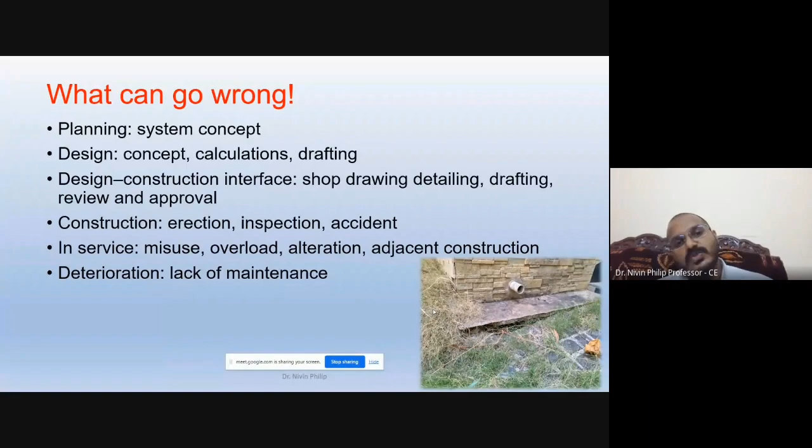So where can we go wrong? We can go wrong at the planning stage, maybe at the design - that is concept, calculation and drafting stage. Construction interface or shop drawing time, it also happens. Erection at the construction time, erection inspection, and accidents also happen. In service condition, maybe overload, maybe design alteration will happen. At the time of design alteration, maybe we neglect some loading condition or alterations - we didn't redo the design. So these kinds of issues will happen. Also at the time of service life, maybe overloading, also deterioration because of lack of quality of material will also cause an issue in the failure of the structure.

So the main reasons for failure may happen due to negligence, then incompetence - that is, failure to understand the engineering principle with respect to technical limitation. When we deploy some engineers at the site, maybe they don't have enough experience to understand the drawing or the shop drawing, and that will also cause issues at the time of implementation. Then oversight - some documents may not consider the safety aspect, that's also an issue. Greed - normally everyone is working on the profit side. Then disorganization, miscommunication between the engineers, the laborers, at the execution stage - these will happen. The reasons for failure will vary, so we have to identify the exact reason.

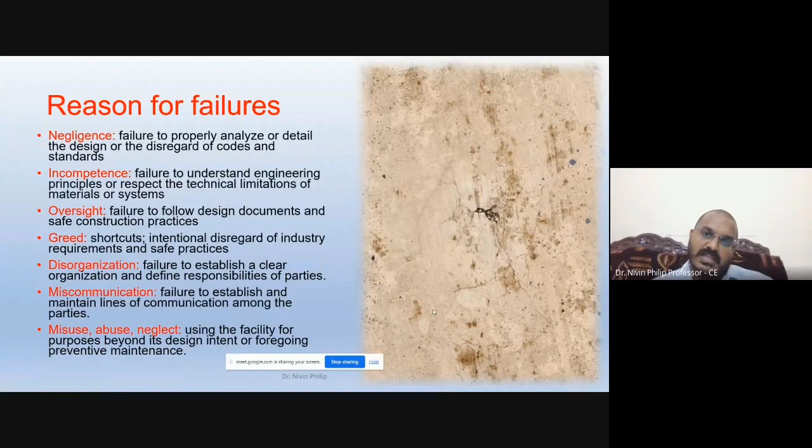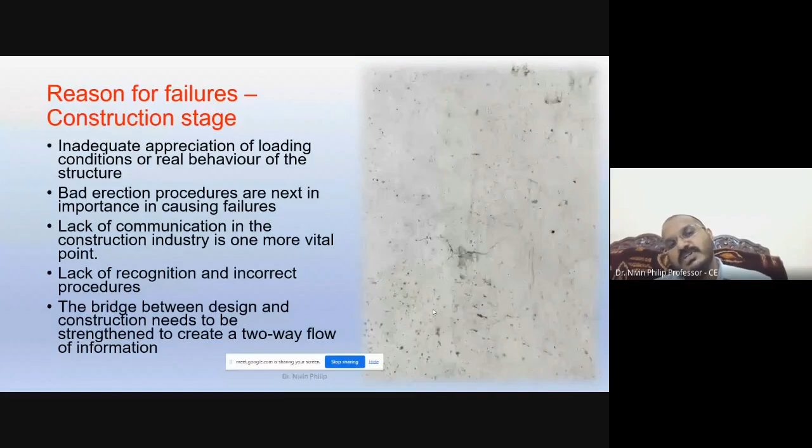Then also at the construction stage - inadequate appreciation of loading condition, bad erection, lack of communication between the structural part and the construction execution part - this will cause an issue. If you look at this figure, these cracks happened due to the construction and the design. This slab crack happened when the design gives a two-way slab with short span and long span.

So this exact reason we are finding, we have to find when we are going for a forensic investigation. What kind of failures can we expect in a forensic case - maybe structural deficiencies such as overstressing, cracking, excessive deformation, or vibrations that are observed. When a part of the structure fails, say 50% of the structure is failed, sometimes the damage already occurred before.

When we face such cases, it is already in dispute or in court, which already happened - maybe when I have attended some cases which already happened in 2010, and I am going to visit in 2019. So it already happened 9 years before, and we are going to judge and evaluate that kind of structure. This is what happens when we go for a forensic structure investigation.

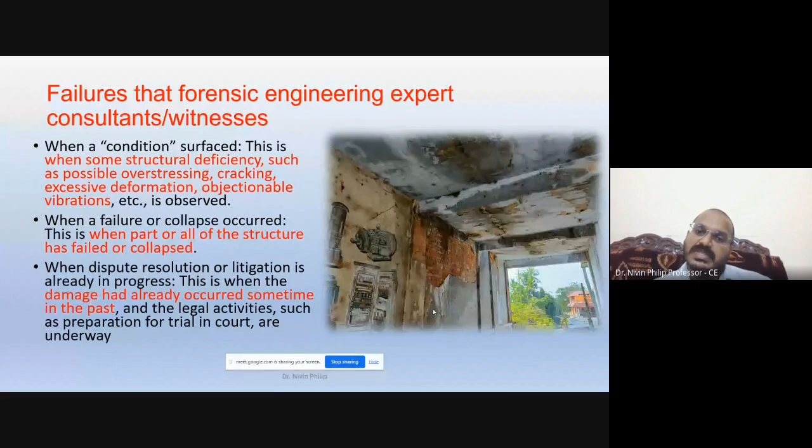You can see this side, it is an old construction which has happened, and this is the structure. You can see most of this structure, it's not a structural failure, it is more of a deterioration failure. So the quality of the material is comparatively poor, and maintenance we can say is less. So these kind of many factors will come into picture when you are going for a forensic investigation.

So how do we avoid this? How to avoid means, how will you evaluate? We have to evaluate by structural engineering level, that is at the design level, or material quality level - how the quality of material we are using. Then we have to know, when we are making a complicated structure, we should know what should be the behavior, how it behaves - that is what we have to evaluate.

Then based on observations, we can identify any inharmonious material, defective specification, any settlement, restraint or constraints that happen, any severity in secondary stresses acting on the structure from time to time, maybe any modification. The stresses acting on the structure - if any defect already happened and we are modifying the structure, then that failure may be prone to failure, or may extend the failure.

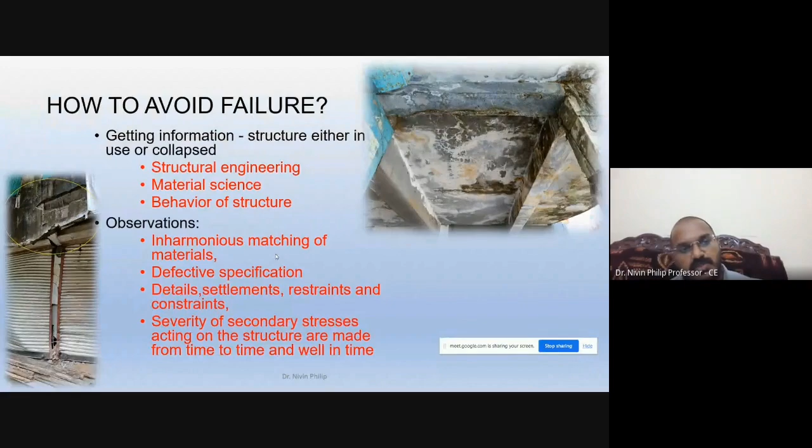Also, some cases happen when an accident or something happens, the structure will also fail. That case also we have to identify - the exact reason or how much damage happened in the structure. The left side figure is due to a collision of a vehicle into the building, and the total column and nearby beam has collapsed. So these kind of cases will also come, other than quality or design issues.

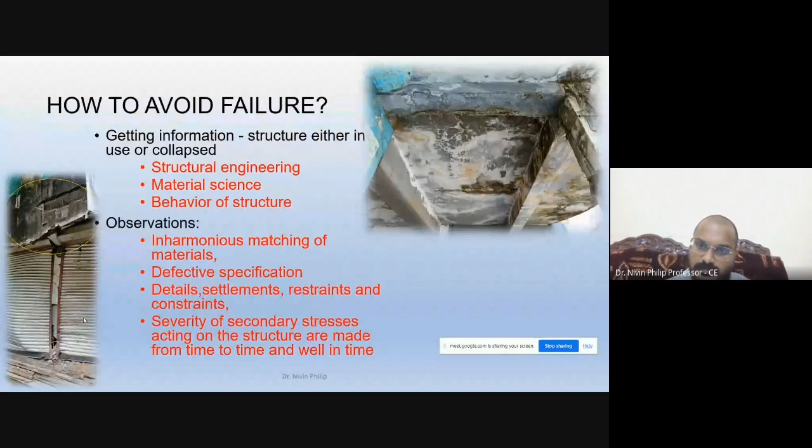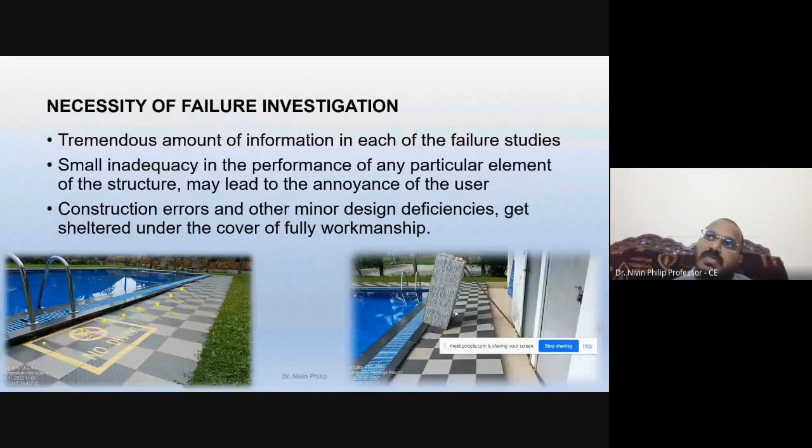So why is investigation necessary? Normally we require a tremendous amount of information when we are going for failure studies. Small inadequacy of performance in any particular element of the structure may also have an issue in the failure. So construction errors and minor design deficiencies get a shelter - they hide within this.

So in most cases, if anything happens, it will go to the workmanship - it is attributed to the construction. But actually, a lot of cases are there where the design itself has some fault. So in forensic investigation, we are identifying these kinds of reasons.

So then at the investigation, what should be the outcome and how should the technique be done? When we are going for a forensic investigation, we have to collect information from the technical side, as we already told. Then political issues - anything that happened inside. Then the legal aspect - how the failure happened, what will be the legal procedure, whether it is in court or with any dispute committee, we have to go through that also. Then serviceability - whether the failed structure is repairable or total demolition is required. So that kind of studies.

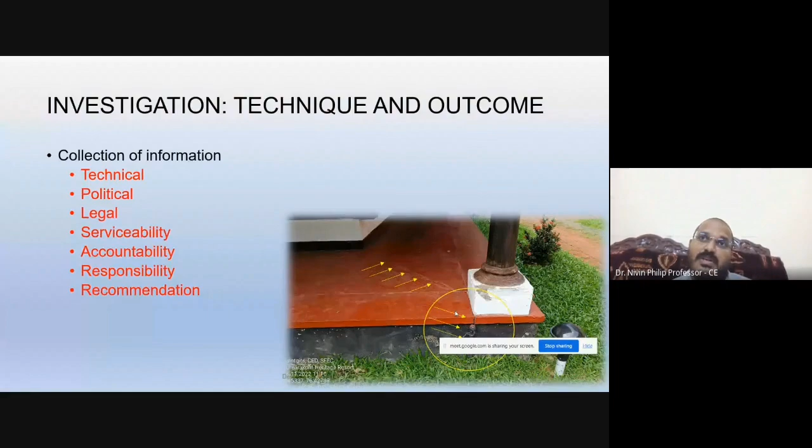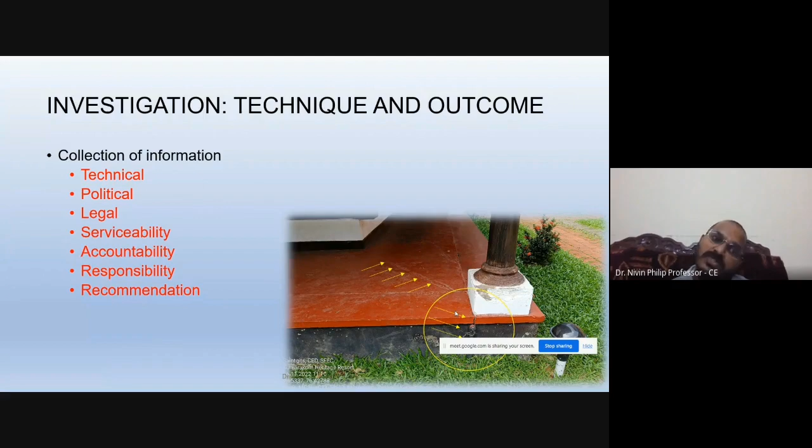Then accountability - accountability means when the failure happens, who will be accountable? Who will pay for it? If any insurance is there, or if there's any fault due to external issues, who will be accountable for this kind of money? Then responsibility - who will be the responsible person to take the remedial action? So accountability and responsibility will be a main part in forensic investigations. And also, as engineers, we have to give recommendations and solutions - who should be accountable, who should be responsible, and we have to give the exact solution.

We also need some constructional aspects. Confidentiality should be required when going for forensic investigations, since in most cases these are for a legal aspect. So what we are doing should be confidential, then costing, then we have to identify at what stage the failure occurred, and identify any unusual loading, misuse of the structure such as overloading or any alteration not intended in the initial design.

Then deterioration of the structure may be due to poor quality of material used, external chemicals, or other issues. Then special activity damages, and additional alterations as I already told you.

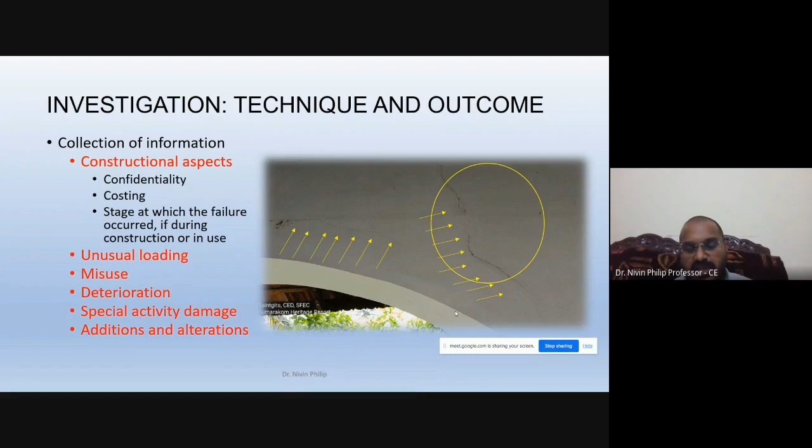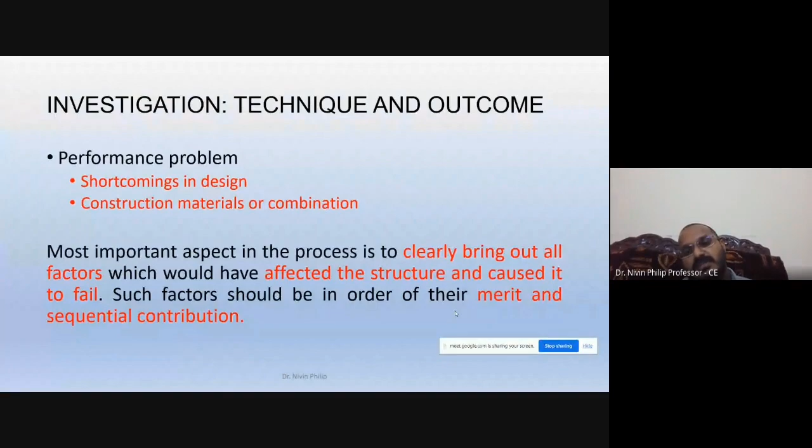We have to identify the problem, collect data, and then decide what recommendations we are giving, checking any shortcomings in design, construction, or material combination. We have to clearly bring out all the factors that affected the structure and its failure. That is the main aim of structural engineering.

So why is it different from a conventional investigation? What we do is go for an investigation involving observation, technical assessment, damage causing source, and present safety recommendations normally. We are not going to give the exact solutions, because that requires a certain level of investigation and additional equipment for proper assessment.

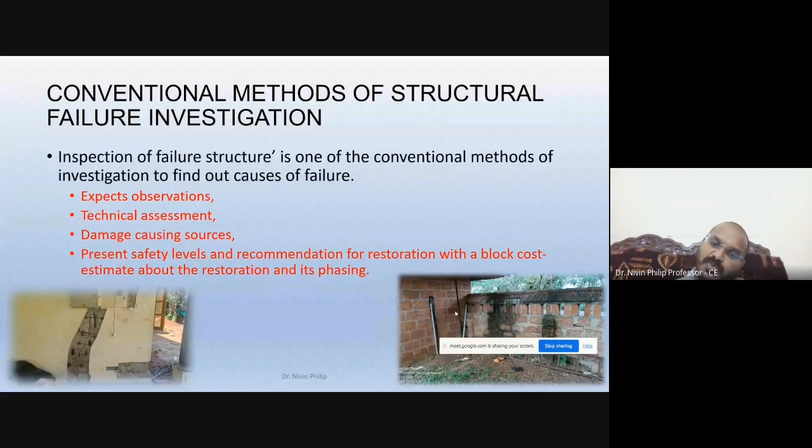So in early days, we only did visual exploration or some small non-destructive tests like the rebound hammer test. But now we have to give an exact solution, how to rectify or how to give a proper solution.

These are the conventional checks when going for inspection: checking the external facade for any peeling of plaster, efflorescence, plinth protection, any water presence or groundwater flooding, any plumbing issues, additional projections or construction on the building, terrace inspection, and housekeeping for any water flooding or improper drainage. These are the things we normally inspect during a normal investigation.

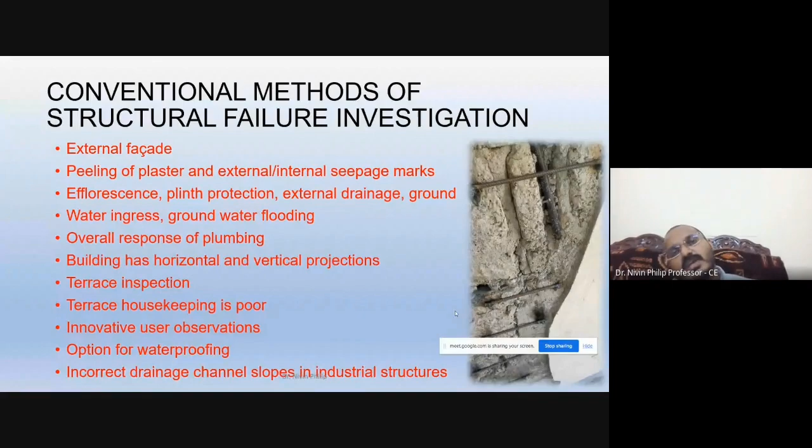So why forensic investigation is important is because we need the exact technical specification of what solution, at what location, should be given. That's where forensic investigation comes into picture.

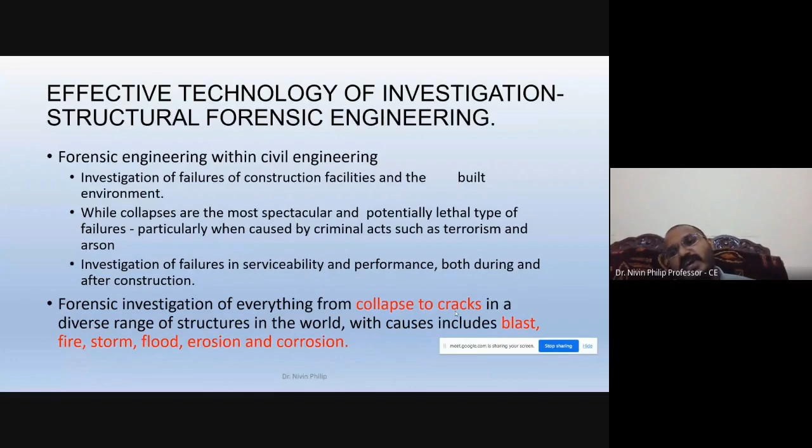Forensics means investigating everything from collapse to cracks across a diverse range. That means we have to identify the reason from the design level to the collapse level. It may be caused by seismic activity, flood, corrosion, fire, etc. We have to identify the exact reason.

So exactly, forensic investigation means gathering necessary information on the cause of failure, applying engineering to define an instance when a structure does not conform to design expectations. When it is not designed, failure may also be due to insufficient design. If the structure is not properly designed, that is also a failure condition.

Collapse is not always necessary when you say a structure has failed.

So what can be done in a structural forensic investigation? First, we have to identify the damage assessment, giving exact reasonable clarity on the causes of damage and measuring the extent on the structure. Also decide the appropriate corrective measure - how will you quantify it, and how will you rectify it? That's the main part.

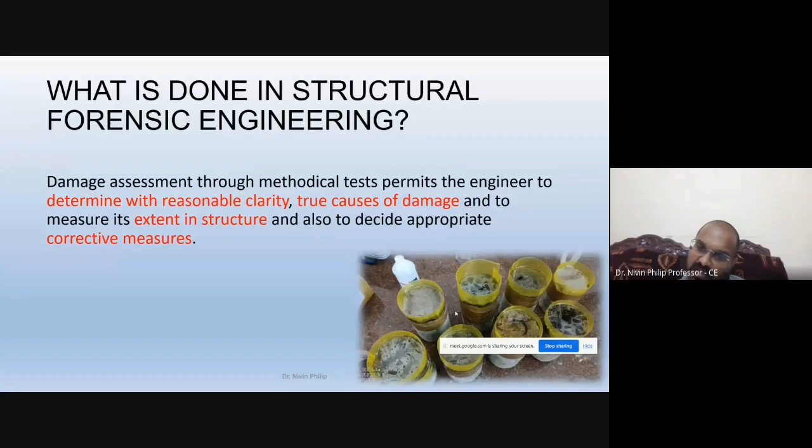In structural forensic investigation, we can do this in two ways - destructive testing and non-destructive testing. In destructive testing, some examples are given: we take a core sample for compressive strength testing. This is the cylindrical core sample we cut from the site for testing compressive strength, as shown in the last slide.

Then for RCPT, rapid chloride penetration test, for checking permeability or porous nature, we take samples around 100mm diameter by 50mm depth. From that, we identify the porous nature of the concrete.

Then we drill samples from the site of the structure to identify the presence of chloride or sulfate in the materials, or whether the structure is exposed to chemicals causing deterioration. Then steel sampling - we take a sample from the steel structure first, then do a pull-out test to identify the quality of the concrete.

Then some chemical tests - when we take samples, we can go for scanning electron microscope or EDX XRD analysis. We can identify the presence of chloride, sulfate, and any alkali aggregate reaction. We can technically do all this with these kinds of tests.

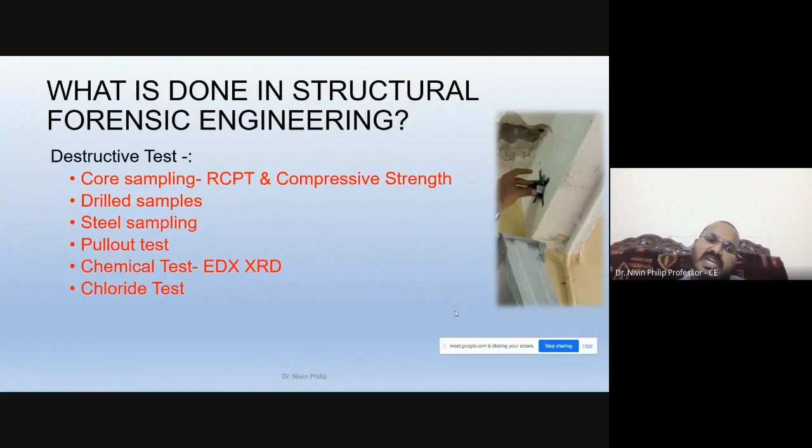So why is NDT important? Sometimes certain structures may have failure that doesn't happen from the outside. So NDT is a good solution. Other than destructing certain reinforced structures, maybe highly reinforced concrete structures, core sampling is not a good solution because we are cutting the reinforcement. Sometimes that will happen. So in order to avoid that, we can go for non-destructive testing.

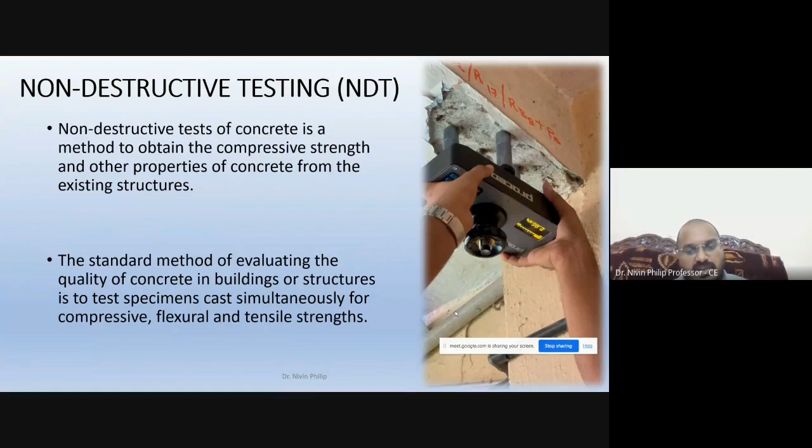In non-destructive testing, we are measuring different kinds of properties like compressive, flexure, and tensile. These are some of the techniques we use for non-destructive testing, like the rebound hammer, which most engineers already know, used for measuring compressive strength. Then UPV, then rebar locator to identify the exact location of the rebar, whether it is given as per the specification in the structural drawing, or when taking any corrosion test we have to locate the reinforcement. Then half cell potential to identify the corrosion rate, to know how much corrosion has happened to the steel. Then pull-off test to identify the cover.

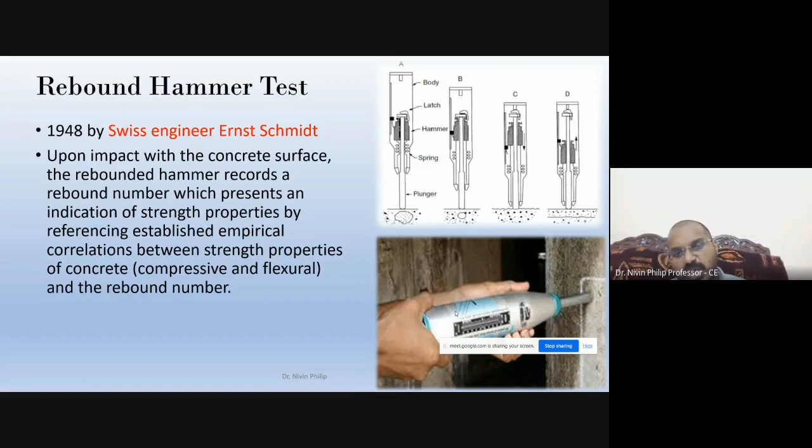Let's go deeper. The rebound hammer, most of them know - we are measuring the rebound number from the concrete surface. I didn't go into the theory. One thing you should know is that when going for a rebound test, if 1 point is concerned, we should take the average of 9 points. The surface should be smoothened, then only go for the rebound hammer test.

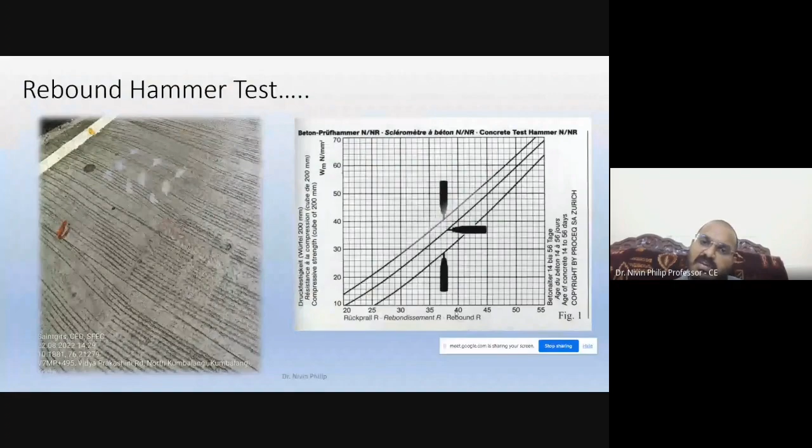Based on the position, how we are holding the hammer, we will get the result based on this curve. So the only thing is, when you are checking 1 point, you have to take at least 9 points, like a grid you have to form. Otherwise, the accuracy is only 15 to 20% variation that will be there with the composition of the cube. So we normally take the average value.

So why are we taking an average value? Because the smoothness of the surface, geometric properties, age of concrete, and surface and internal moisture condition will also influence the rebound value. That's why we are trying to average the rebound value number of a particular point.

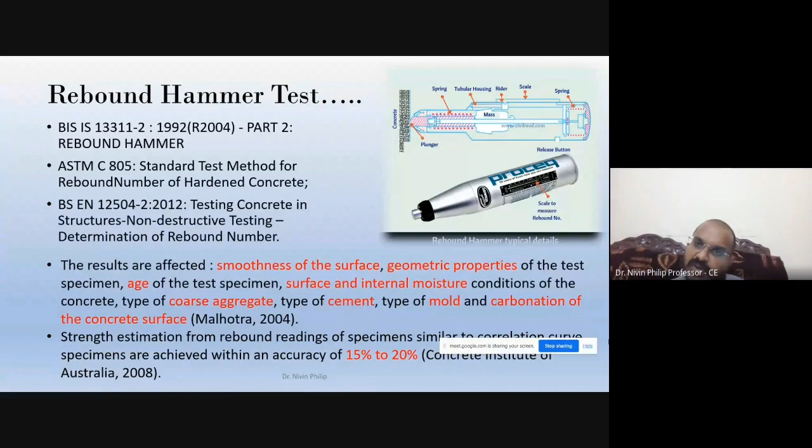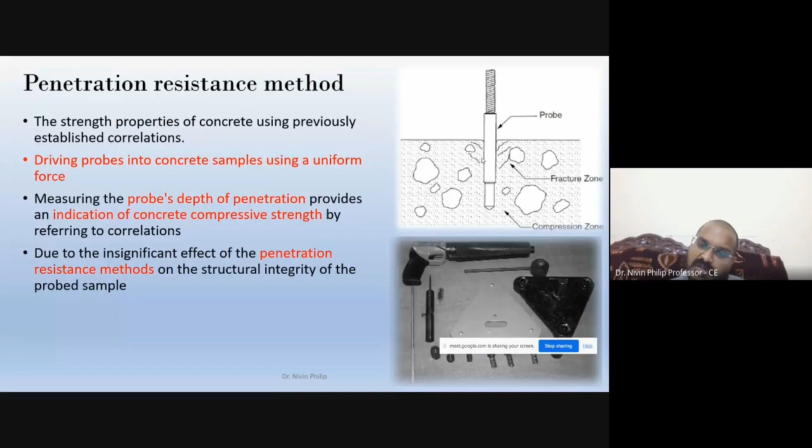Another method is penetration resistance. In penetration resistance method, we are punching a needle into the concrete, and based on the punching depth, we are identifying the strength of the concrete. Nowadays, we are not using this much. In some technical applications it will be there, but we are not recommending it, because if the structure is not damaged, it will create internal cracks on the nearby surface. When we are hammering or giving a punching action through hammering, this will create internal cracks which will later cause some issues in the concrete. So anyway, this test exists, but based on the penetration depth, we can identify the quality of the concrete.

And these are the codes which govern these test methods. Another method is also influenced by operator error. Size of the aggregate will also matter, and the nature of the concrete. Everything - the NDT value will be influenced mainly by, one of the main points you have to note, size of the aggregate has a very much influence on the strength.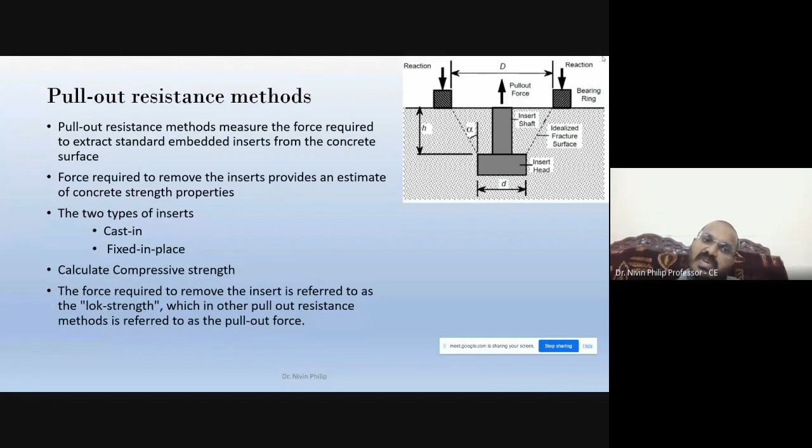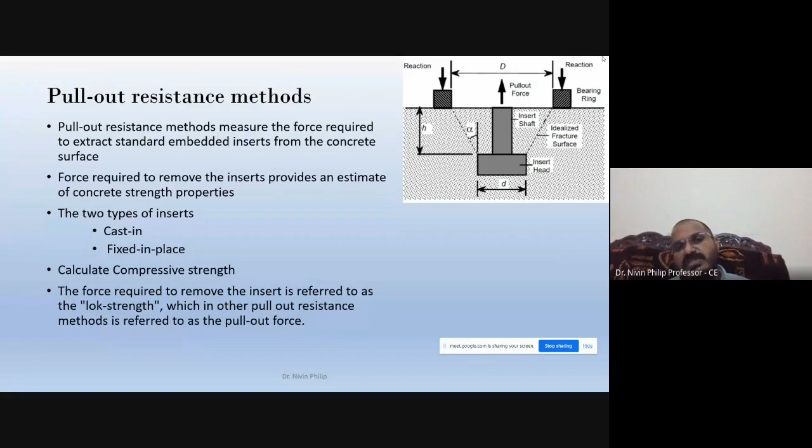So what we are doing is inserting a shaft, and this shaft is pulled out from the concrete. From the pull out, how much resistance it gives, we are measuring. Based on that, we are predicting the strength of the concrete. This is mentioned based on the ASTM standards we are using. Here also, the main influencing factor is aggregate size and the cement mortar, and how much depth we have inserted this head portion - how much depth we have inserted also affects the resistance value.

Next is pull-off resistance. This is very much important nowadays, in which what we are doing is a method to determine the quality of cover concrete. Cover concrete means the reinforcement cover concrete. We are checking the bonding efficiency of the cover portion to the reinforcements. If the reinforcement is corroded, then the bonding between the cover concrete or outer layer concrete doesn't have any contact with the reinforcement, then it will be easily pulled out.

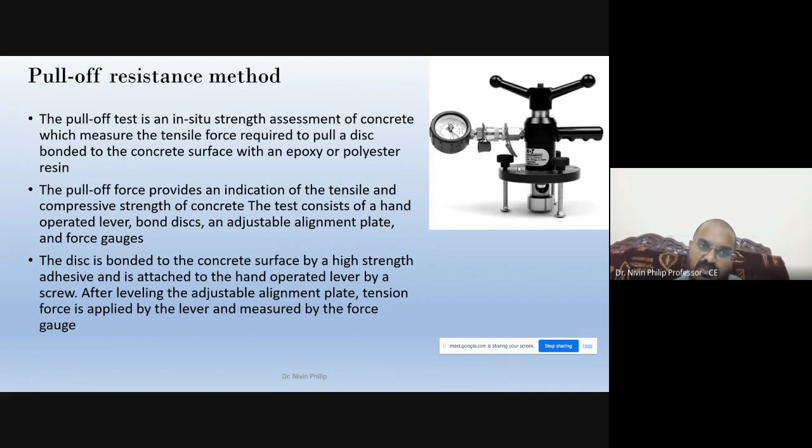So for that test we are using this pull-off test, in which we have a test disc of 50 mm dia. We are attaching that disc to the concrete surface with some epoxy resin or acrylic. Before pasting it, we have to clean the surface properly, maybe with some acetone solution. Then we do the gluing with the epoxy and wait for 24 hours, depending on the epoxy setting time.

Then what we are doing is trying to pull out this disc from the surface. One thing you should remember, after fixing this disc, we have to isolate this portion by making a circular cut, up to the reinforcement layer, about 50 mm diameter, then place the disc. Otherwise, when we are trying to pull out, the nearby cover concrete also has some influence in the bonding, showing some effect on the bonding cover strength. So we have to isolate the glued portion from the remaining concrete. That's why we see a cut is made in this area.

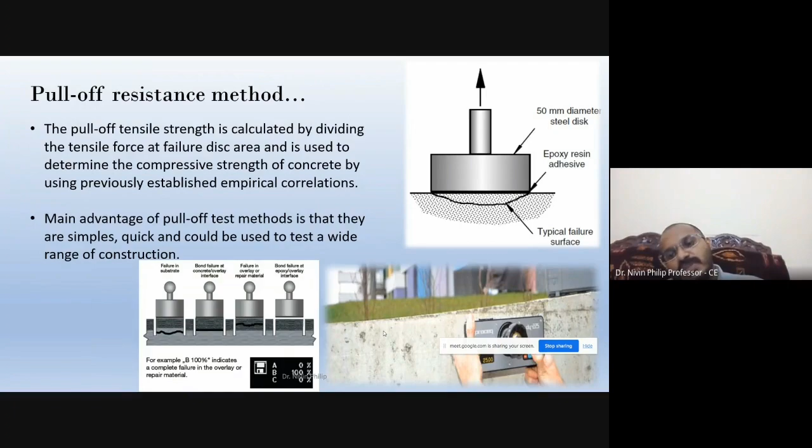Then we try to pull out, and the crack will happen, and we will find out how much bonding strength will be there. When designing, we will see some τbd value, bond strength value, based on the shear stress of the concrete. That shear stress value we get from the test. This test has some limitations: we need 24 hours for setting the adhesive, and it's also influenced by the size and type of coarse aggregate, because we are using a 50 mm dia disc, so a 20 mm coarse aggregate has some limit. Otherwise, we have to increase the size of the disc.

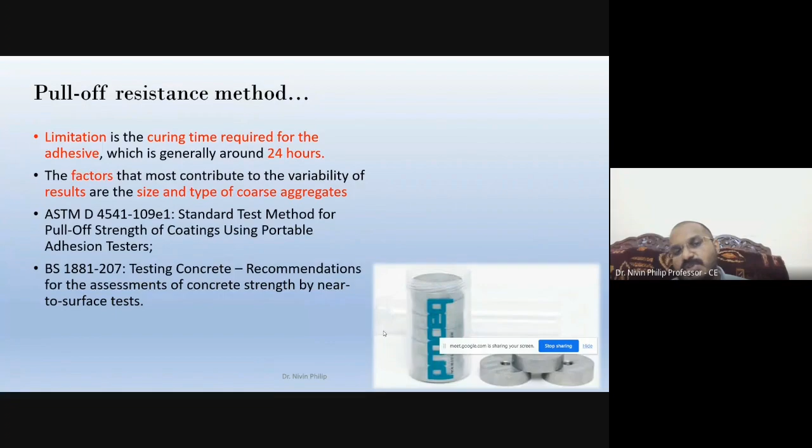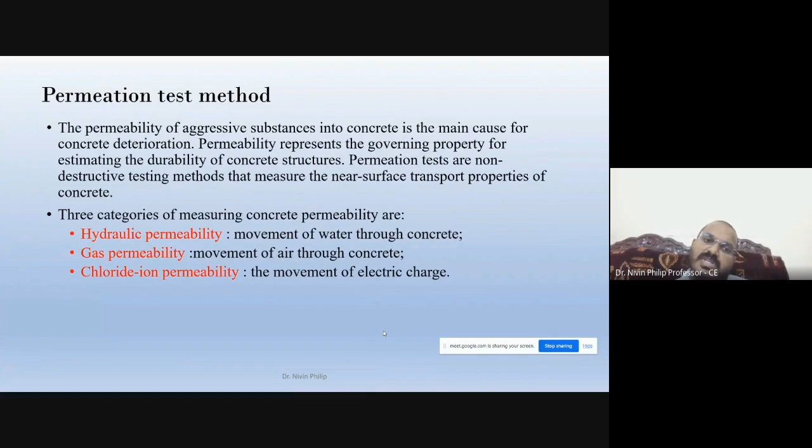Next is permeation test method. Permeation test is a vast area. We can see the permeability test on concrete, where we identify the porous nature. When we are going for chemical pipelines or any marine structure subject to sulfate or chloride solution, we have to check whether it is durable or has less porosity. So at that time we go for permeation test methods. Hydraulic permeability, gas permeability are there. Then as I already told you, RCPT, that is chloride ion permeability - we identify this with the permeation test method.

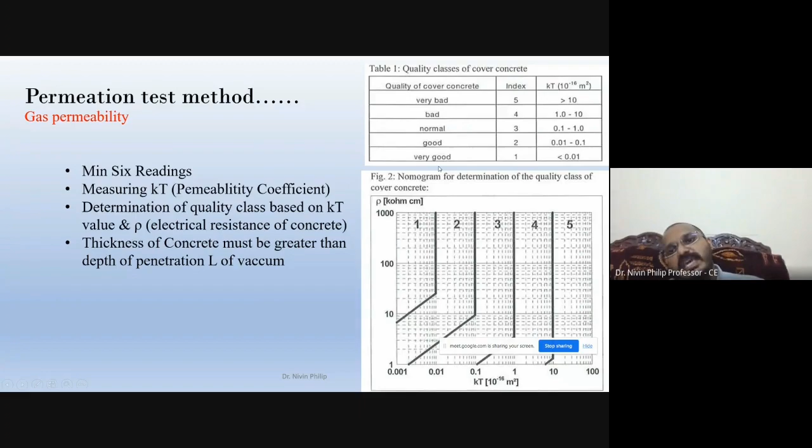Normally it is done for the cover concrete or all the slabs also. Then from the permeability, we get a measurement called permeability coefficient. Based on this coefficient value, we quantify whether it is good, bad, and so on. This classification is based on the kT value. It doesn't quantify any strength or something like that - it's mostly based on the quality of the concrete. Some relations are mentioned, but mostly it is just a representation of the quality.

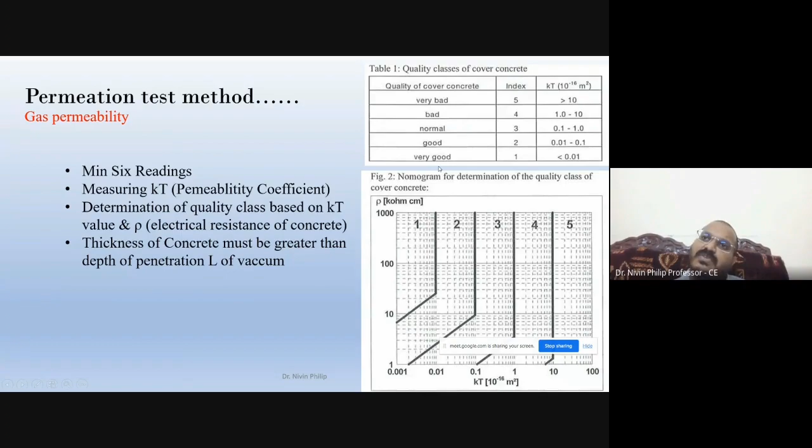High permeability means the concrete is highly porous. For a normal concrete like M25 or M30, if it's good concrete, the range should normally be between 1000 to 2000, or less than 3000. But for high strength or high performance concrete using fly ash or admixtures, we normally get a value less than 1000, because such admixtures give a lower value.

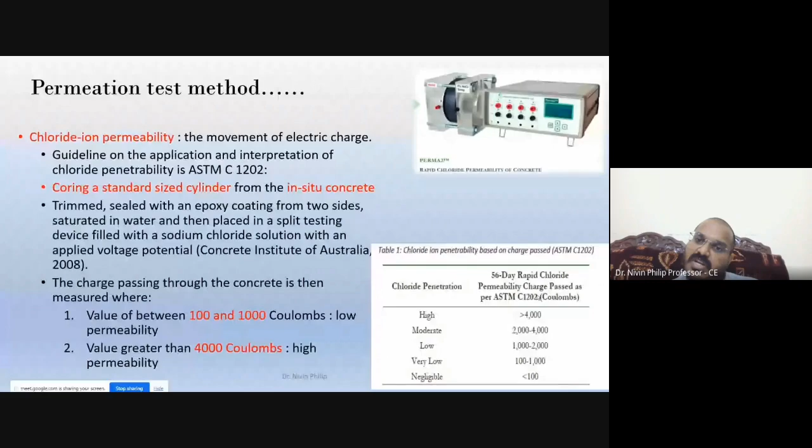In forensic investigation, the use of this is that when deterioration happens, the porous nature increases and the quality of the concrete becomes lesser. In that case, we have to identify whether corrosion is due to poor quality concrete. From this test, we can identify the porous nature of the concrete.

Another technique is ultrasonic pulse velocity. It is used to measure the uniformity of concrete and detect interior damage, any honeycombing, or delamination. So UPV is the initial technique developed.

Now the most modern technique is called ultrasonic pulse echo, which is slightly modified from the UPV test. With ultrasonic pulse echo, we can measure from the same side; it isn't required that one sensor be on the face and another on the side or back side. From the same face, we can identify the echo of the pulse generated, and from that identify any issues in the structure. So this is the modified form of ultrasonic pulse velocity, called ultrasonic pulse echo.

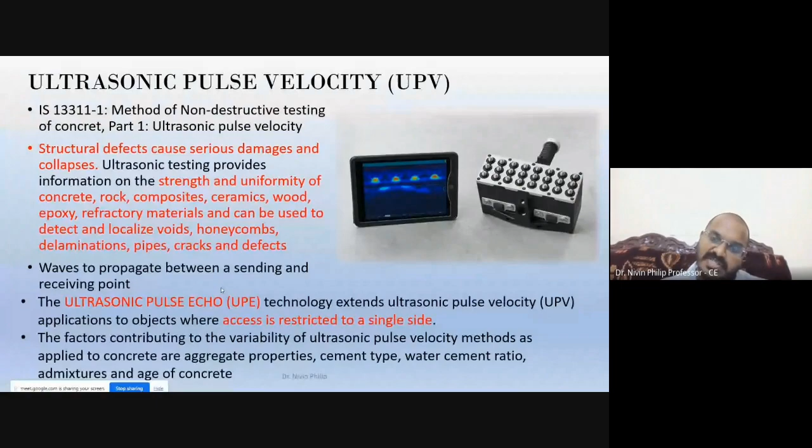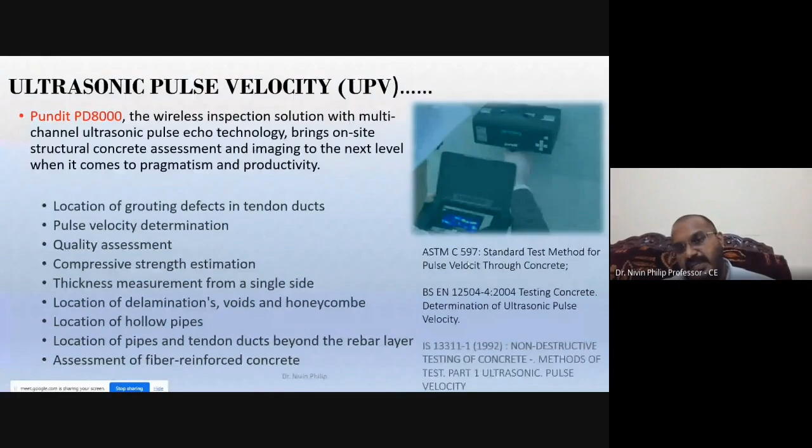And these are the standards. The ultrasonic pulse echo equipment currently available in the market is the PD 8000, given for this purpose, and these are the standards for this kind of test.

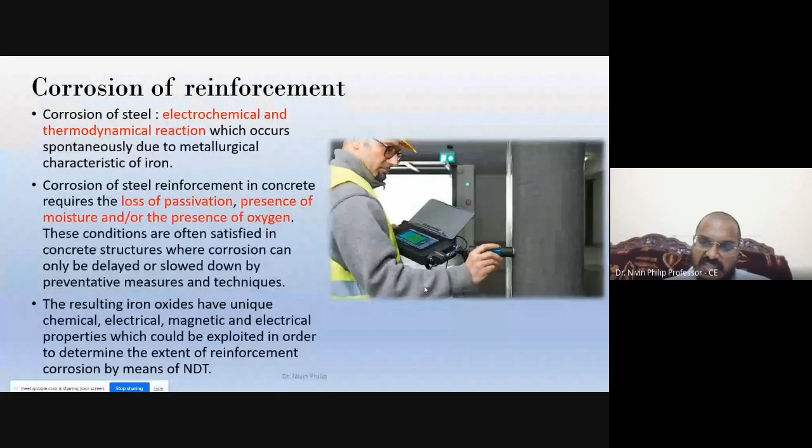One of the main issues in all cases is corrosion. Whatever the reason, moisture or presence of chlorine, corrosion will happen. Corrosion can be tested in different ways because corrosion forms iron oxide, and one of the main advantages is that iron oxide is chemically, electrically, and magnetically conductive, which makes it easy to identify issues in the rebar. So the two methods for corrosion testing are half cell potential, which most people use, and corrosion resistance or corrosion rate, which is a separate, newer technology.

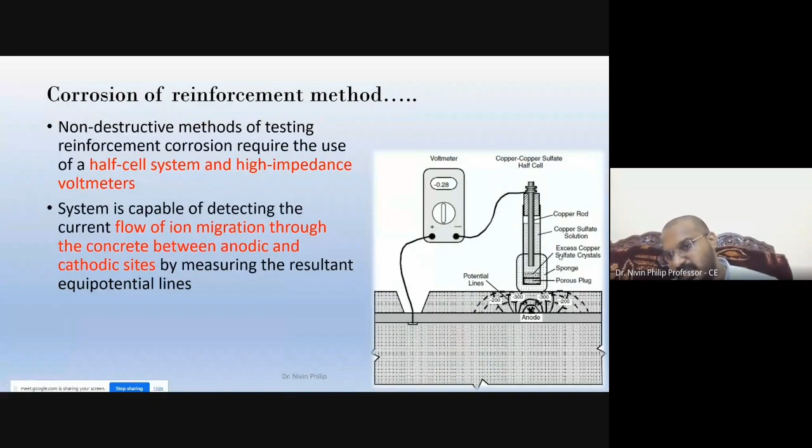In half cell potential testing, we make a half cell using copper and copper sulfate solution. In a concrete structure where the rebar acts as anode, this half cell is placed on the surface of the concrete and connected to a voltmeter's negative terminal, while another wire connects to the reinforcement. One key point is that measuring corrosion resistance requires a connection to the reinforcement, which is the main difficulty of this method - we have to establish a connection between the reinforcement and the result.

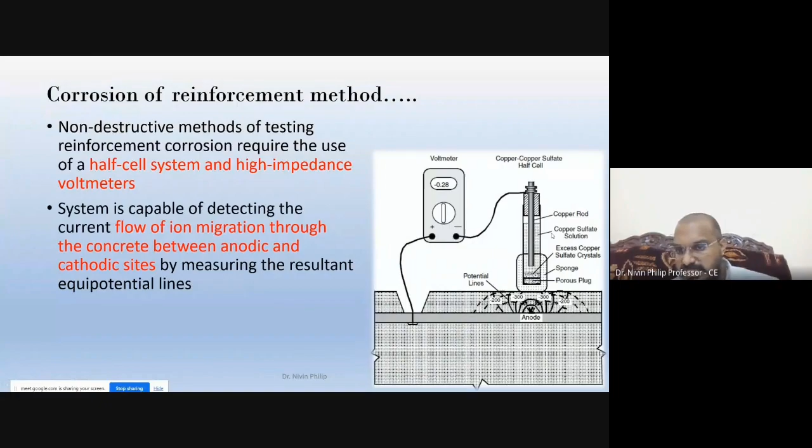This test is highly influenced by moisture content. The surface should have proper and equal moisture throughout; the moisture should not differ across the area, otherwise the test results will be influenced. Current flows through the half cell to the rebar and then to the voltmeter - this is how we make a half cell.

One disadvantage is that the half cell gives a value in only two stages - whether the rebar has corrosion or is good, with no corrosion. If the voltmeter reads minus 350 mV, it indicates 90% probability of active corrosion.

If it is less than minus 200, then 90% probability of no corrosion is there. So in between, we cannot identify how much corrosion has happened, whether we can retain that reinforcement or not. It's a gap in between - either 90% good or 90% bad it should be. So there is an uncertainty in this value.

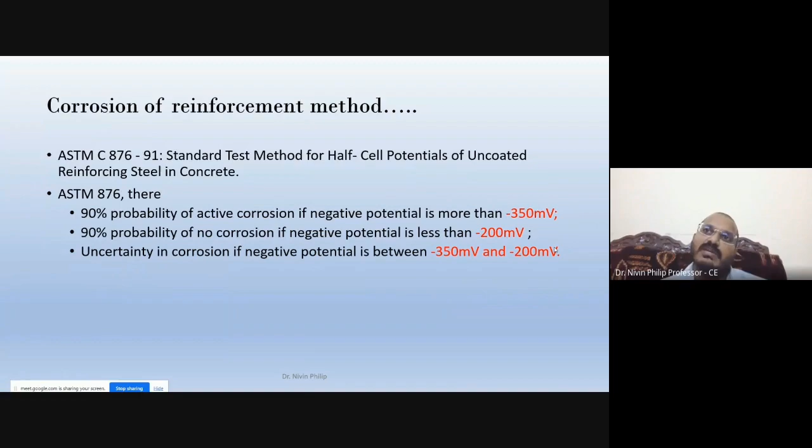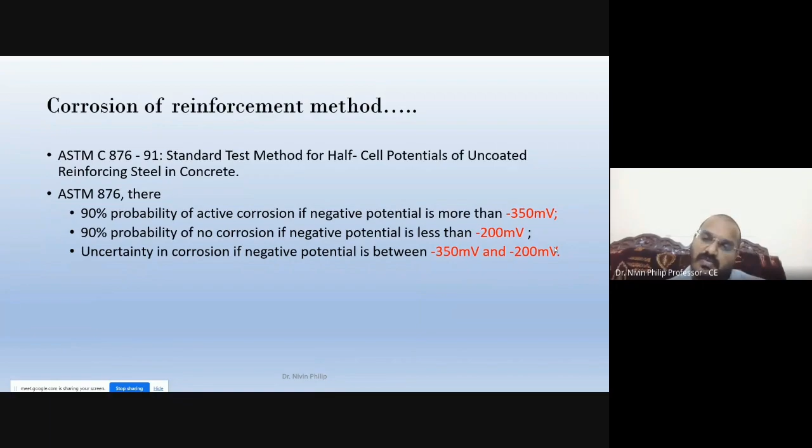If it is between minus 350 to minus 200, we don't have any solution in the half cell potential. That's why we can say that half cell potential is not that much predictable when you are going for a forensic investigation or exact solution. It is not that useful, because sometimes replacing the reinforcement is not required - maybe we can rectify with properly covering the concrete with new cover concrete, which may be sufficient for further reduction of the deterioration.

In that case, this CEPRA technology, or connectionless electrical pulse response technology, comes into picture. In this, what we are doing is measuring the electrical conductivity of the rebar by inducing a high voltage frequency to the reinforcement with electrodes. It doesn't require any connection to the reinforcement. The principle is that at lower frequency, the corroding rebar will show a high voltage, but a non-corroding rebar doesn't have any change in the voltage. So from that technical point of view, we can identify whether the rebar is corroded or not.

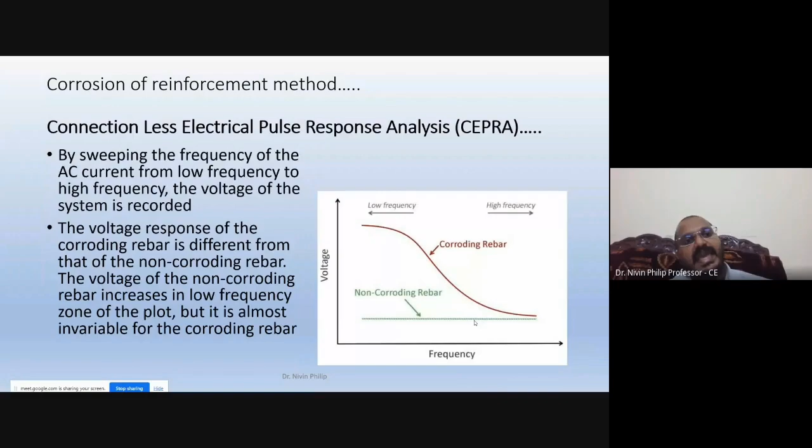And this is the most modern technique nowadays used for finding corrosion. In this case, it is very helpful for identifying the exact reasons for the corrosion happening in the structure.

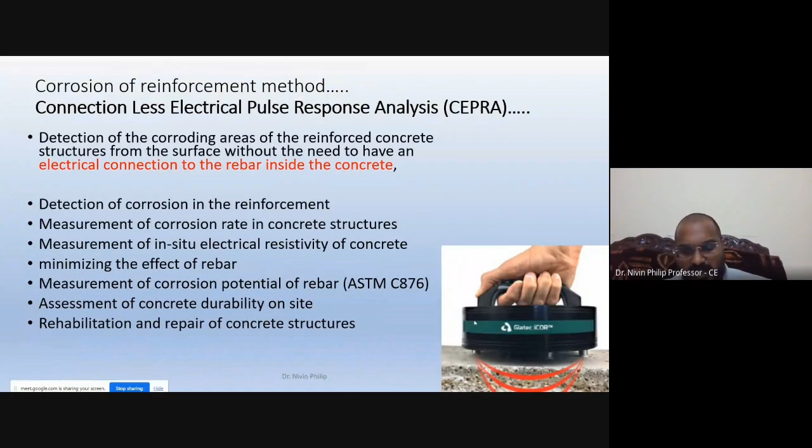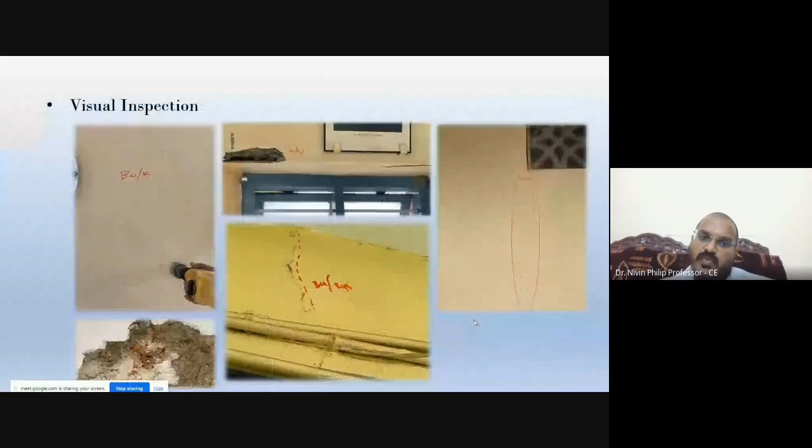Now I'll move on to one case study which I did in 2022. We are investigating a forensic stability assessment of a seminary building, which was vastly constructed in the 60s or 70s in early days. So first, what we are doing for a forensic analysis is the same thing, conventional - we go for a visual inspection, identifying what type of crack should be there, and collecting samples of the materials.

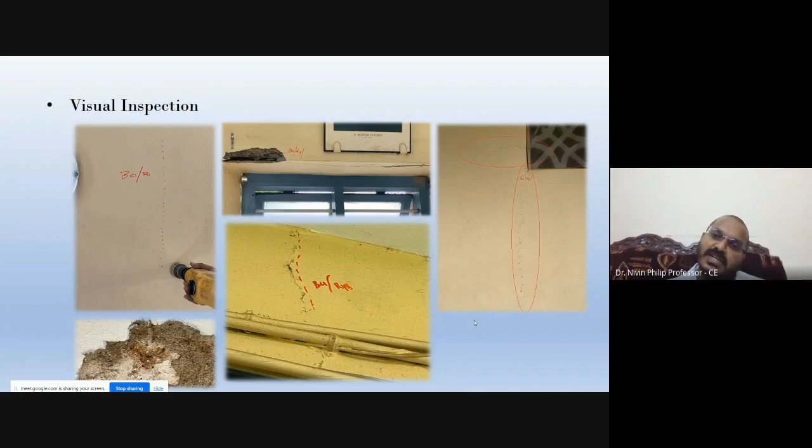We are identifying the location of deteriorations. Wherever there is a crack, we have to mark it and identify how much the crack has propagated, to what extent, whether it is extending to the foundation, and whether any delamination or spalling has happened. So we have to identify everything by visual inspection, and if any moisture presence or corrosion-specific spalling happens, we have to identify and mark each endpoint.

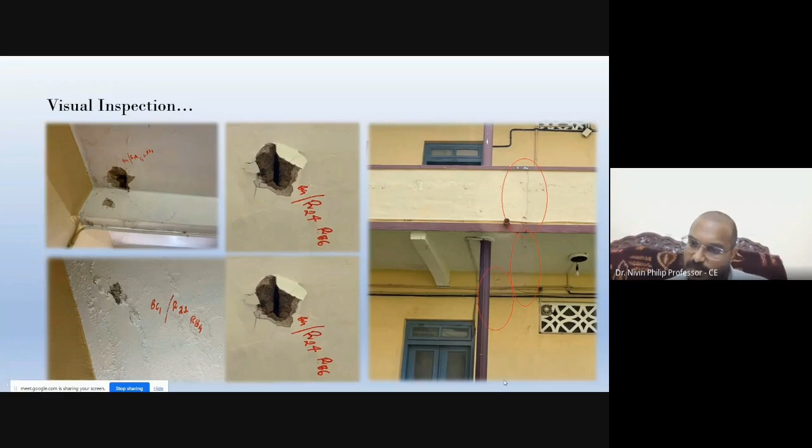So you can see on the right side a crack which is propagated from the foundation level up to the roof slab level. It is going on increasing, so this is the main cause. If you look like that, we can identify that the issue happens from the foundation level itself. So this kind of thing we have to identify before going for any NDT or core sampling.

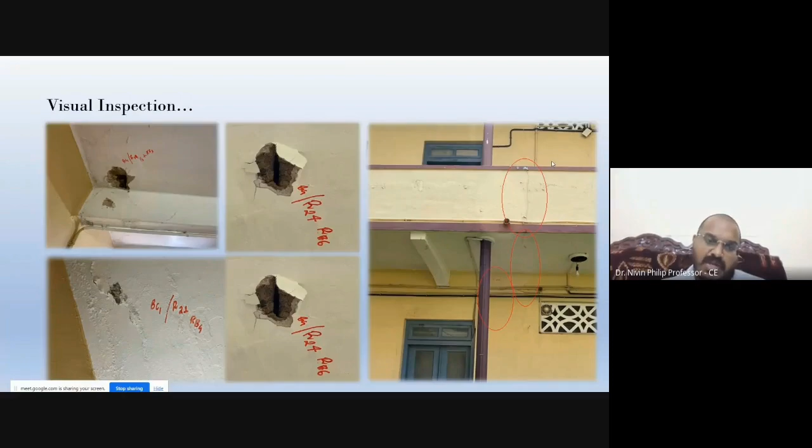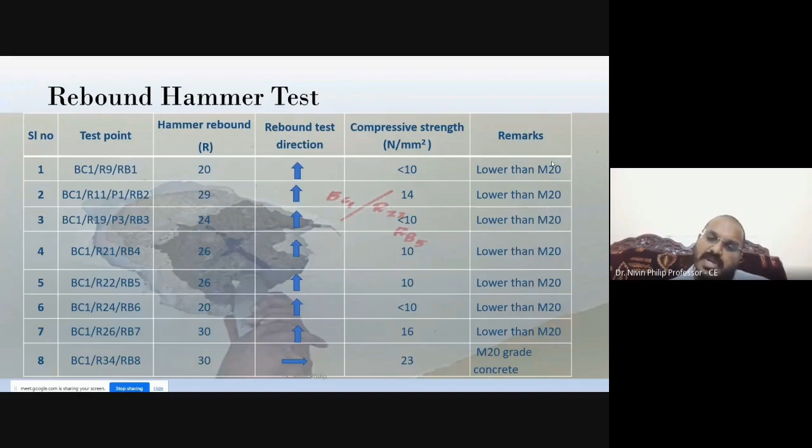Then what we have done is gone for measuring the quality of the concrete at that building, and we found around 100 points like that. We identified the compressive strength at each point, and we monitored that most of the areas have compressive strength less than 10 Newton per square. So the concrete is getting deteriorated due to some chloride or sulfate issues. It is getting lower than M20, so the concrete strength value is lesser compared to how much is required for an RCC.

Another test we conducted is the pull-off test, which I already told you - we are measuring the bonding of the cover concrete with the reinforcement. Normally the failure will happen when measuring debonding. It will come in 0.41 to 3.41. 0.41 means, for a compressive strength, the bonding stress will normally be given for M20 to M40 - it should come in this range, 0.41 to 3.41.

But in most of our cases, these values are much lesser, below 0.41. So only 3 points I got around in between 0.41 and 3.41. Rest of the points are lesser than 0.4. That lesser than 0.41 means the rebar is already corroded - there is no bonding between the reinforcement and the cover concrete. So we can conclude based on that.

If you look at the 3.38 and 1.30 values, we can say that some concrete has the quality of M30, and somehow lesser, maybe M20 or lesser. That 1.3 value is coming, maybe it is coming around M15 range only. So this kind of thing we can identify from the bond strength value.

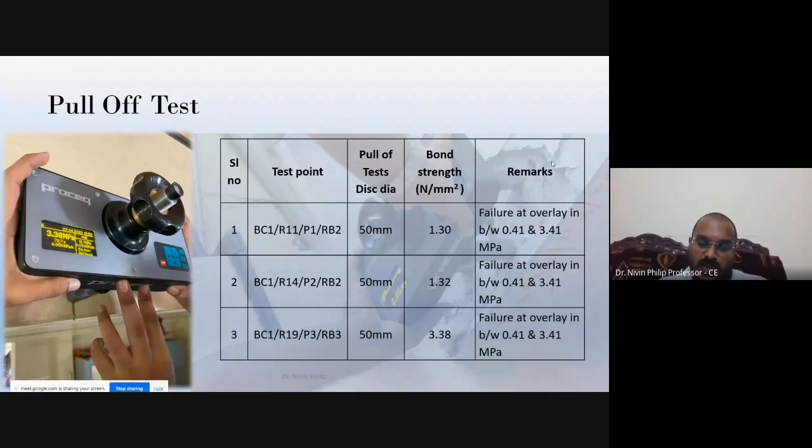Before going to that, the concrete surface should be properly prepared for the equipment. Any painting or coating should be removed before the test, because in between layers we cannot identify the exact percentage of corrosion. So what we have done is we just gridded this form.

In corrosion resistance testing, we are mapping the whole area as a contour. How much area can we contour? Maybe 10, 20, or 30 meters, we can make a contour, no issues. At least 4 points are required to make a contour. So we made a grid of 9 by 9 and removed the cover concrete, plastering, paint, and cover portion, then tested at that point.

We tested both in the x direction and y direction. The x direction and y direction mean both the slab's long span reinforcement and the short span reinforcement. We obtained a value called corrosion rate. Corrosion rate is different from corrosion potential.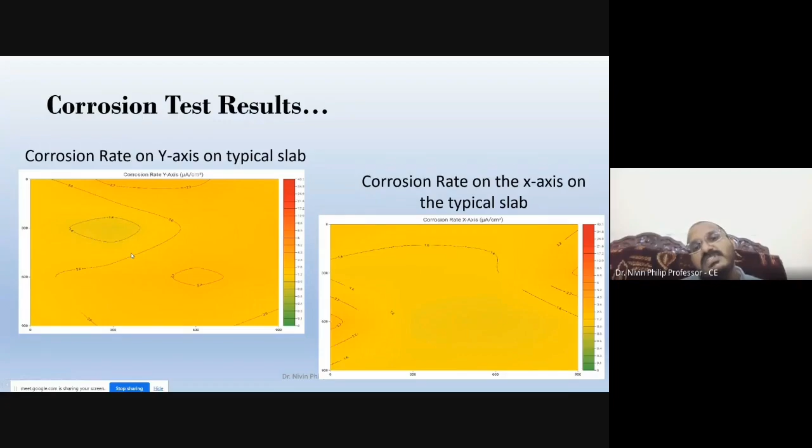So if it is properly maintained, we can use this reinforcement; further down, there are chances we have to repair it. But with a half cell potential test, the issue is it only tells us either corrosion has happened (so we have to remove the concrete) or no corrosion happened. In this case, we can identify how much percentage of corrosion has happened.

This is the y-axis, this is the x-axis - the only difference is one measures the long span reinforcement and one measures the short span reinforcement. And this is the concrete resistivity. Simultaneously, the same equipment can measure concrete resistivity also. Concrete resistivity means whether the cover concrete has the quality to resist corrosion - that's what is measured in concrete resistivity.

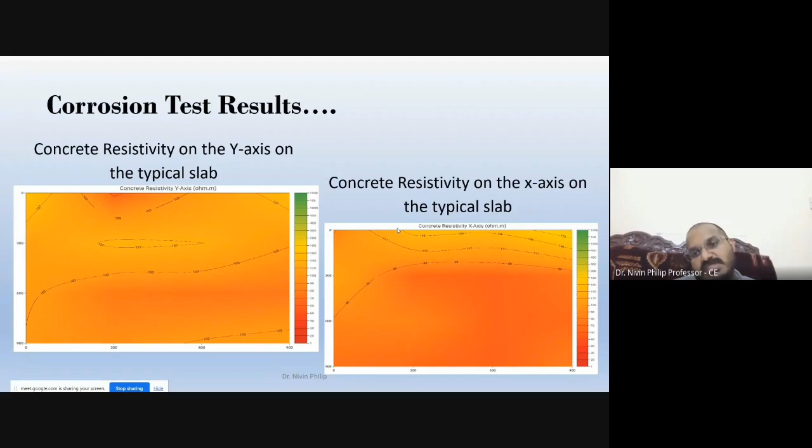So if you look at this picture, corrosion has happened. If you look at the next picture, you see it is a highly reddish color, which means the concrete is too porous. If any moisture or chloride presence is there, it will be susceptible to corrosion, so this porous nature may be the reason for the corrosion.

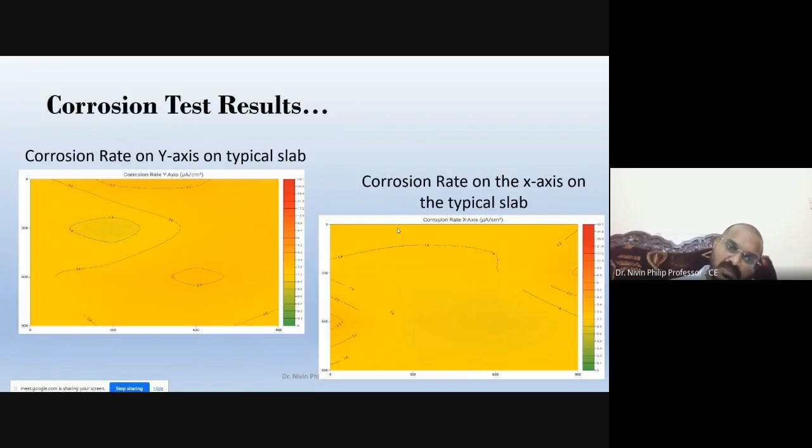Sometimes, if properly painted, this won't happen, but the cover concrete quality is much lesser in this case. So either we have to remove the cover concrete, or we have to avoid further penetration of moisture or chemicals to the reinforcement. This is what we need to do, because this test shows the quality of the concrete is very low.

This is another slab portion with a similar result. We can see the corrosion rate on the y-axis is good, though somehow corrosion is happening. But if you look at the concrete resistivity, we can see 50% of the area has a greenish tint, with a value of 295 only - that's the greenish portion within this range - and only certain portions have a dark reddish color.

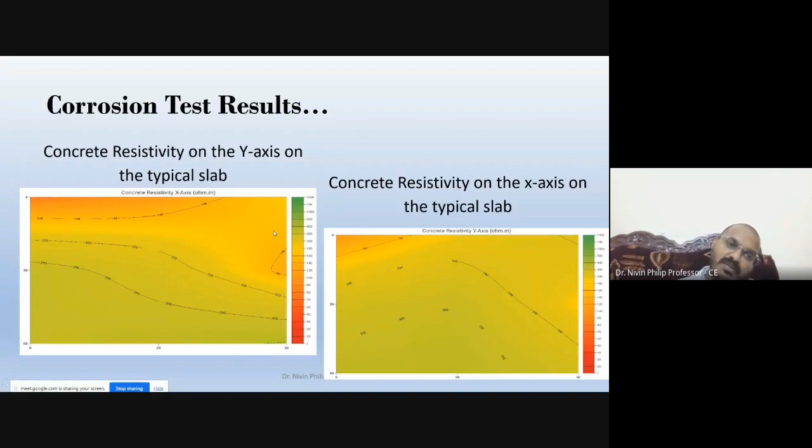That means this area is highly porous in nature. So by doing this concrete resistivity test, we can identify where the concrete quality is low, and at that point only we have to rectify it. So we can rectify just the required portion by identifying this contour. The remaining portion, which shows a slight greenish color, maybe we can avoid any major repair work, or just do some painting - a simple solution is sufficient to prevent further propagation of moisture.

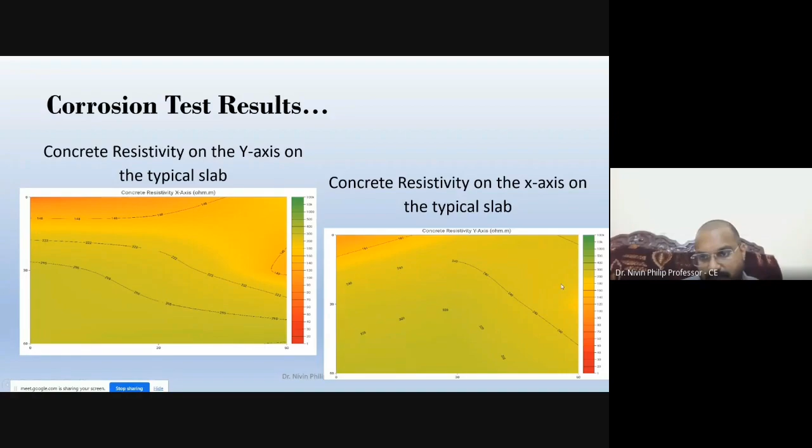This is for a floor slab. Next, another case study. This is not done by me. The company gave me a case study of what they had done there.

In this, they measured the corrosion of a whole bridge at the deck portion, abutment and pier portion. They scan the whole bridge. One main advantage of this equipment is that it doesn't require any connection to the reinforcement. Also, 5 to 15 seconds is sufficient for taking one point. So for evaluating the whole bridge, we won't take as much time as half cell potential. It is very easy and comparably simple.

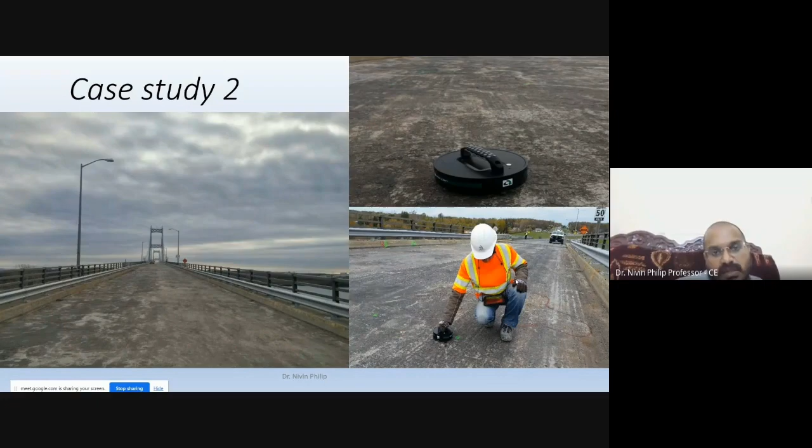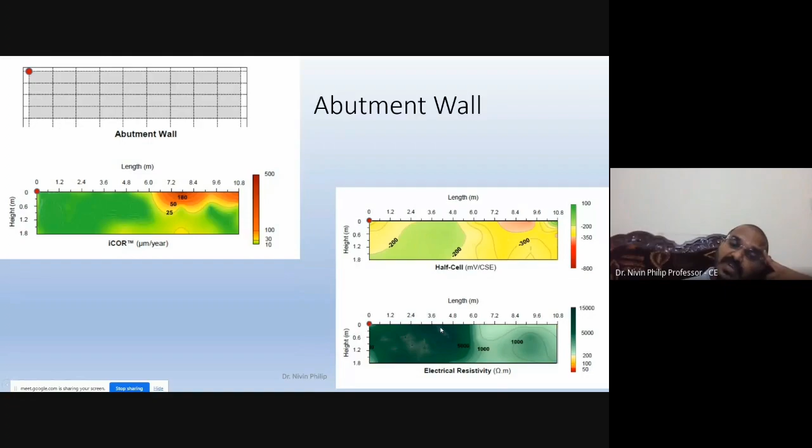In this, they monitored around the abutment quality using this scanning machine. From that, they get a value. The value from this new machine is called ICOR. They have patented it like that. It is the corrosion rate value, and they compared it with the half cell potential and electrical resistivity. Electrical resistivity is an old method of identifying corrosion by evaluating the concrete quality, whether corrosion has happened or not. If you look at the three methods, we can see ICOR has an exact solution.

Of where it is corroded, or how much percentage is corroded, less corroded area, and some greenish portion also there - that is a good area where no corrosion has happened.

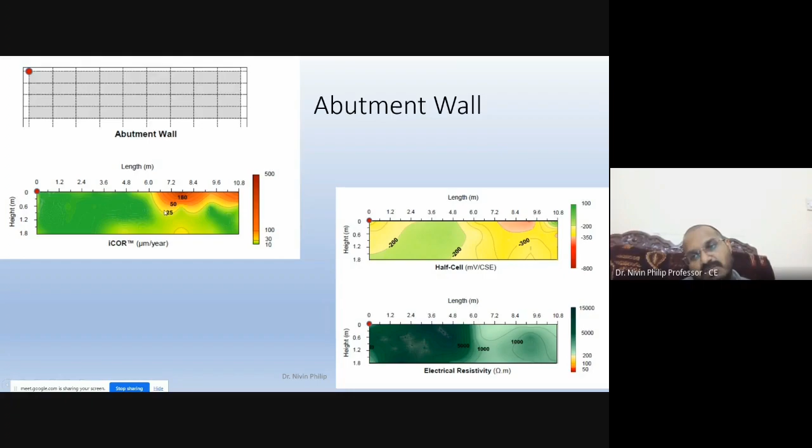But if you look at the half cell potential, we can see that a lot of area has a yellowish tint, which is the blackout area for half cell potential. That is minus 200 to minus 350. We cannot predict whether corrosion has happened or how much percentage of corrosion has happened - that is not given. Only above minus 350 or below minus 200 do we have a solution for half cell potential.

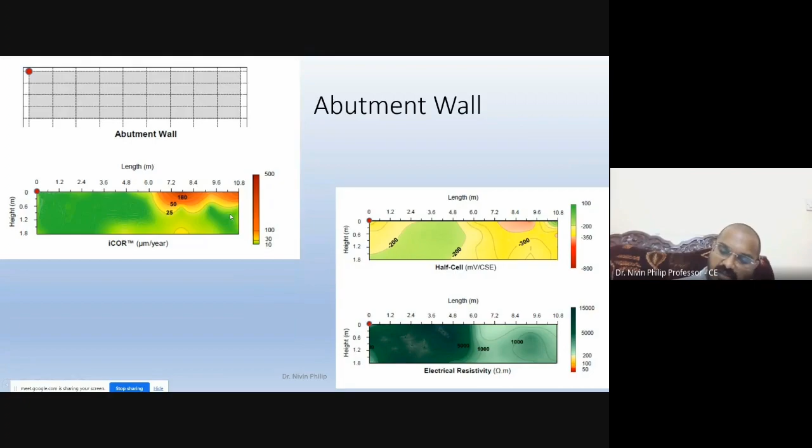In that case, ICOR has a very good solution for analyzing the deterioration or quality of the reinforcement. Similarly, for the deck portion also, we can see a similar kind of graph. You can see the values, and we can see the small isolated areas. If you look at the X and Y axis, this is the whole length they measured - length 0 to 12 meters, height 3 meters. So this whole deck area was evaluated based on this, identifying the exact portion where corrosion happened.

Based on that, we can rectify it. If you look at the half cell potential, the main issue is that most of the area is a yellowish region, and we cannot identify the exact portion or what we have to do in that yellowish region - whether we should repair the cover concrete, or do any other test. In electrical resistivity, nowadays most people are not using it because it doesn't give an exact solution anywhere. Most of the area shows a greenish color suggesting it's good, but in most cases that's not true. So electrical resistivity is not used nowadays - only half cell potential and ICOR are used.

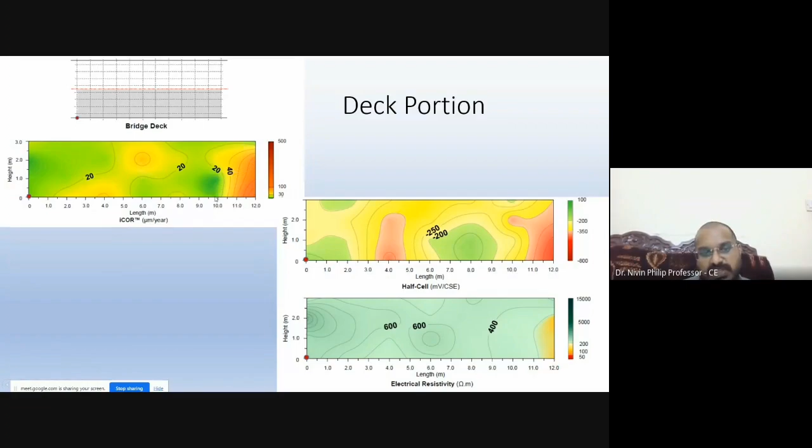So ICOR has a better positive side. One main advantage is that when using this equipment, we identify where corrosion has happened. Simultaneously, after removing the concrete portion and repairing it with new concrete or any cover, we can test after 28 days whether that repaired area is good or not. If the repaired area gives a positive greenish color, then that is sufficient confirmation for the repaired wall.

So again, the concrete wall is good, and the structure can be repaired safely. We can evaluate our performance at a later stage. Simultaneously, if the contour map gives a yellowish color, we can also predict how many years the remaining reinforcement will last, or how much deterioration or corrosion will happen after some time. From that value, we can somehow predict the life of the corroded rebar if no repair is done, or otherwise identify and repair it at the right time.

So when doing a forensic analysis, we have to go for in-depth deterioration analysis. This is only one part, about 30%. For the remaining part, we have to address all the political accountability and responsibility issues, and give an exact solution. In earlier days, we didn't give exact solutions - we couldn't quantify it. Forensic means we have to quantify everything and give an exact solution for the forensic study. In most cases, the forensic study comes from the court or legal issues, so quantifying is very necessary in that case.

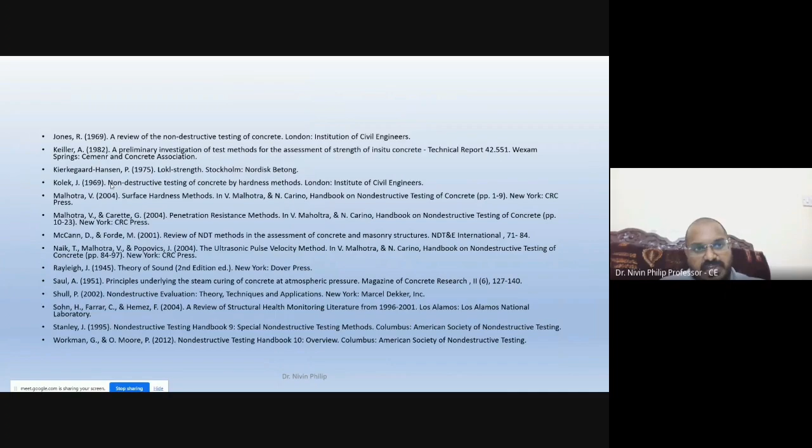So that's also from the case study, and that's all. Thank you. If you have anything to ask.